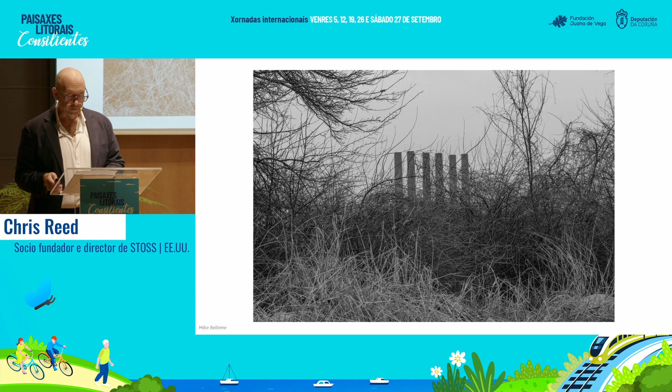Resilient landscapes, those that can shift and adapt with changing urban and environmental conditions, can be appropriated to restructure existing cities, to remediate and revitalize the infrastructural excesses of times past, and can form a new center point for healthy bodies and sharp minds, for social interaction and civic discourse, and sometimes just for pure fun.

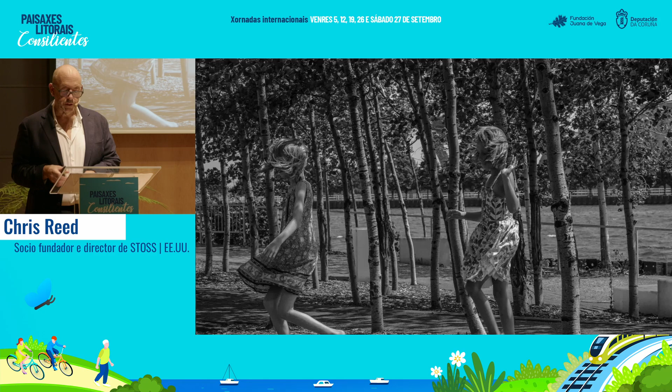Starting in the 90s and early 2000s, I was part of a movement formulating, testing, and applying concepts of landscape urbanism, whereby landscape and ecologically based systems could be infused into city-making efforts.

This work was rooted in late 20th century ideas of ecology, characterized by dynamic systems that were open to interactions across small and large scales, and that could change and adapt over time.

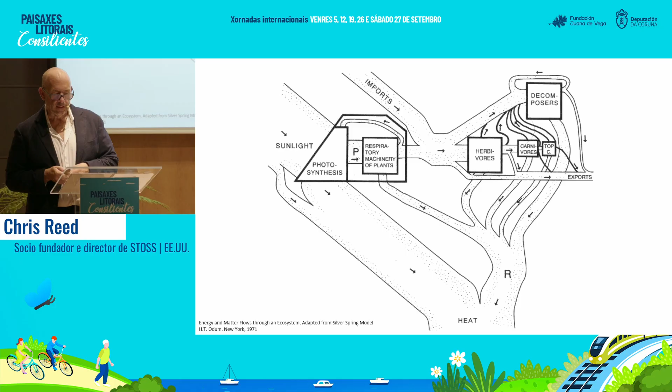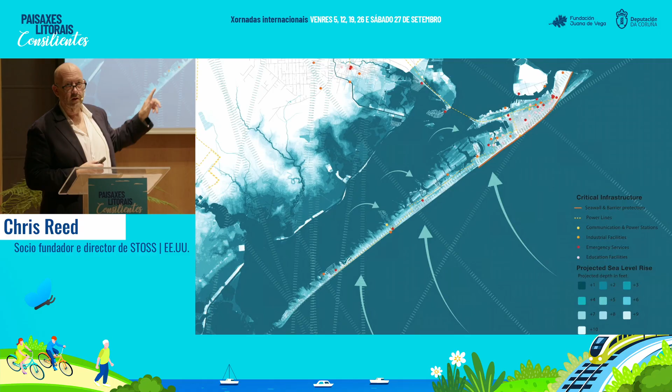What you're seeing in this image are flood projections from sea level rise and the course of numerous hurricanes that have hit this island over the decades.

The idea here was that cities formed or reformulated in these ways could offer richer and more fecund relationships with the broader environment, as directly organized by and experienced through a dynamic public realm.

Now, in many ways, these ideas were not so different than Frederick Law Olmsted's proposals for urban park systems in the late 19th century in the US.

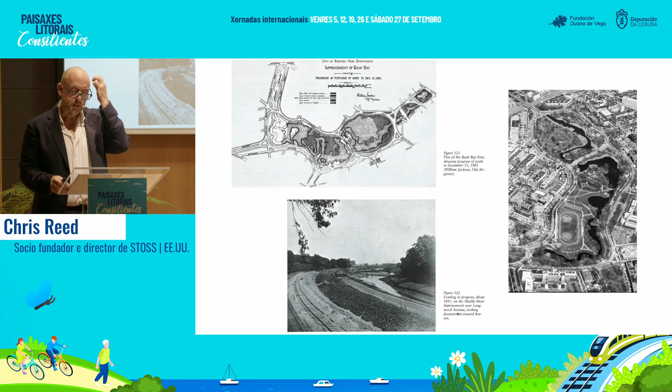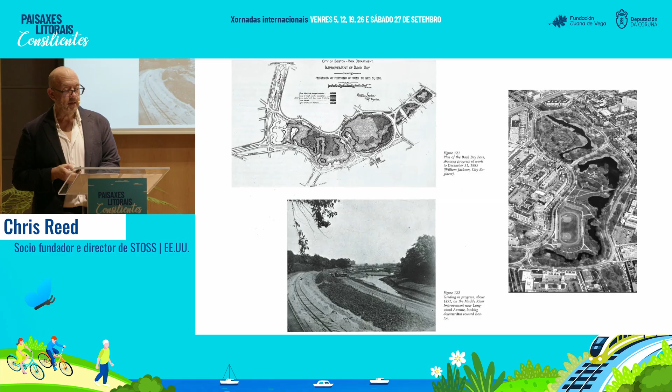In this way, these landscape-based park systems were green city building initiatives. Early on at Stoss, we explored these ideas in various projects.

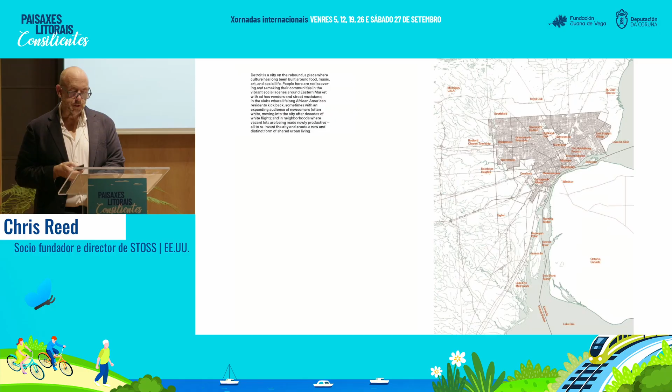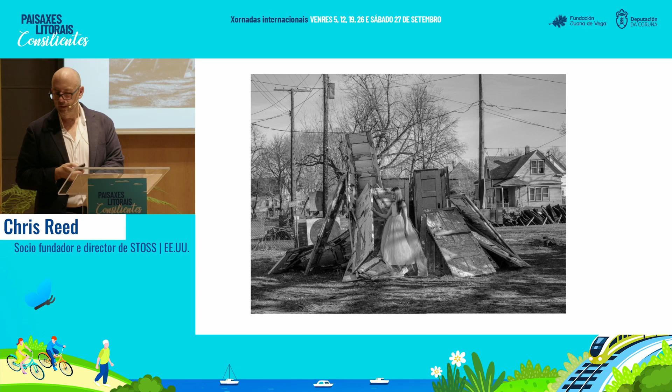In Detroit, a city that had experienced massive population loss and extensive vacancy, we drew on the emergent successional nature of landscape and a wide range of back-to-the-land, urban cultivation, arts and culture, and food culture initiatives in order to rethink the ways in which the city might be organized around vibrant green systems, landscape systems, green infrastructure, and new forms of green urbanism that foregrounded productive and functional landscapes and new open spaces at the heart of new neighborhood types.

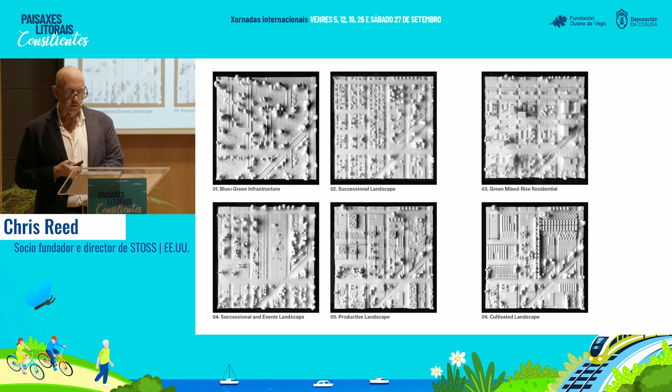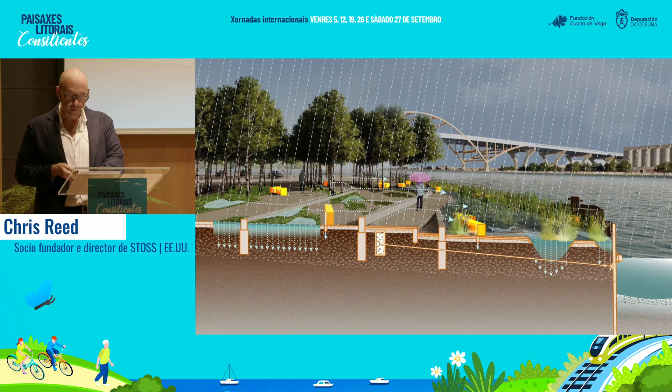And we started asking provocative questions. How might early experiments with dynamic stormwater and river flooding, and giving back space in the city to water and to restored urban ecologies and habitat, as imagined here in Milwaukee in the upper Midwest of the US.

How might a project like this inform proposals, much larger scale proposals, for high-density urban neighborhoods on the lakefront in Toronto, built around the logics and dynamics of a reconstituted mouth of the Don River?

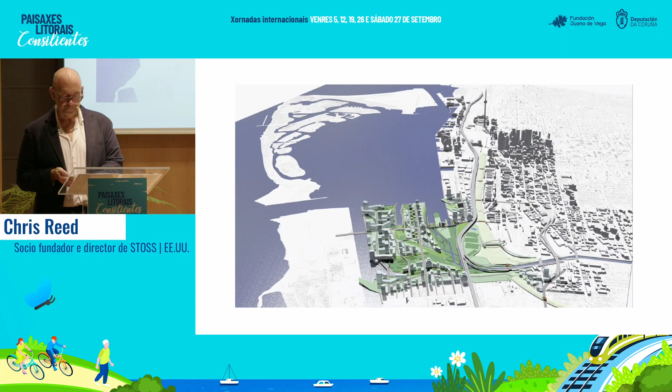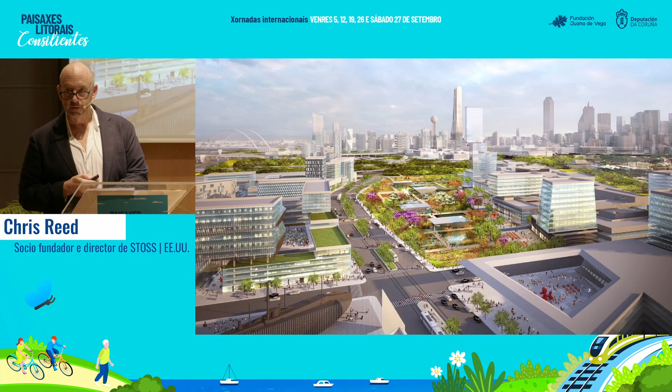How might a project like this inform proposals for mid and high-rise neighborhoods built around the stormwater waste of the city of Dallas, Texas, newly remade as water gardens and life-giving urban forests that offer biodiversity and direct contact with nature in the heart of the dense city?

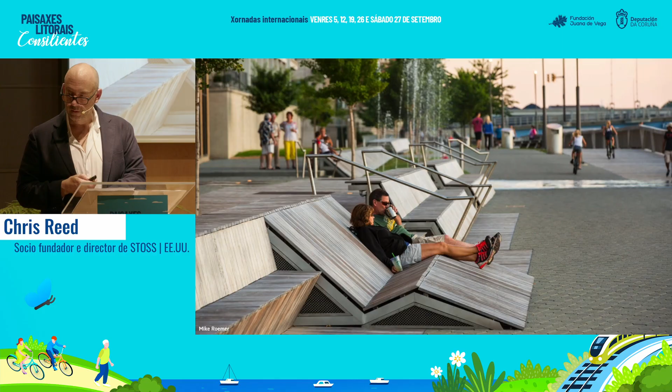And how might speculations of the ways in which large-scale hydrologic systems could be used as a basis for restructuring and revitalizing the center of Green Bay, Wisconsin, organizing both new open space and new mixed-use development around a civic riverfront designed both for people and for flooding?

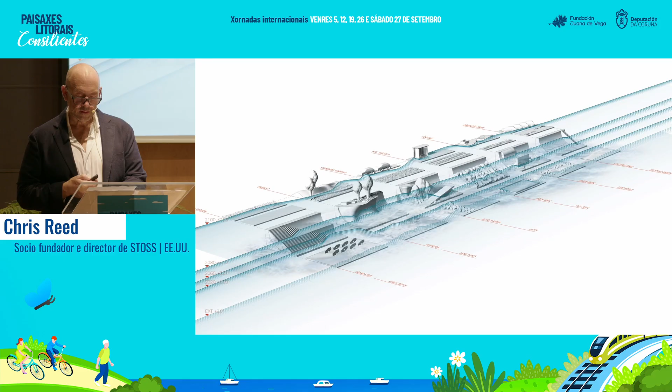How could projects like this inform proposals at larger scales in Galveston, Texas, for instance, that are designed to integrate floodable and adaptive landscape that revitalize individual neighborhoods and opportunities for experiencing regenerative new open spaces across the island?

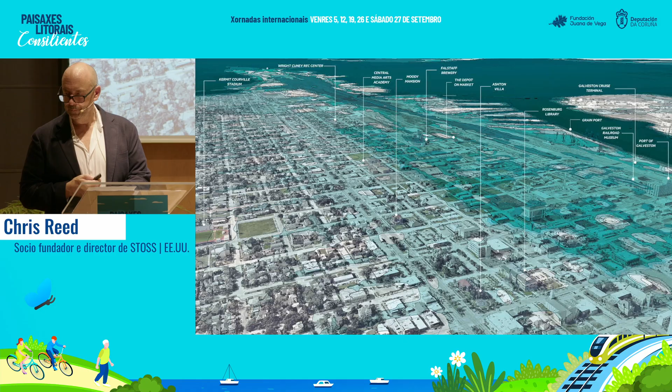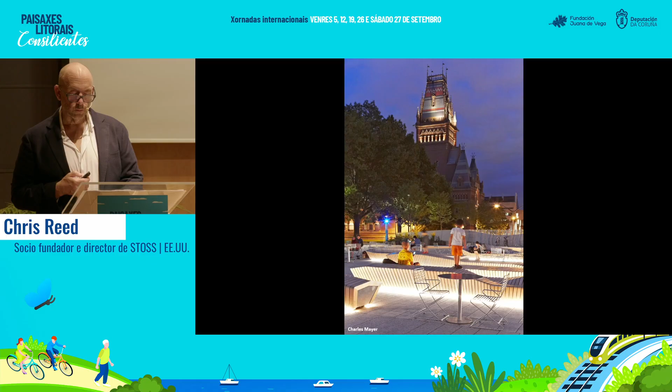At Harvard University, a new public landscape atop a roadway tunnel creates a new center of social life on campus, bringing together the academic community with residents, workers, and visitors who pass through the space on a daily basis.

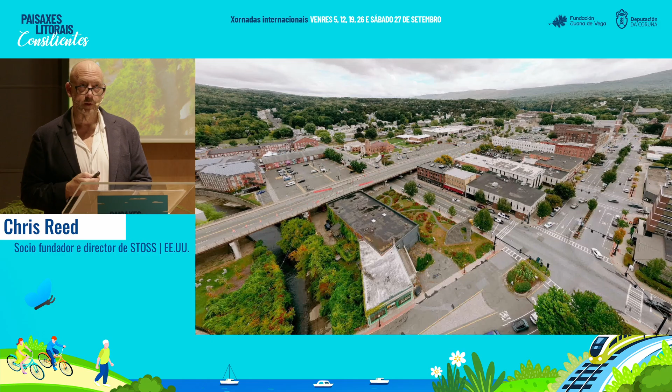In North Adams, a former industrial community in northwest Massachusetts, a proposal for removing a highway overpass constructed in the 1950s restitches the downtown and a vibrant contemporary arts museum to the Hoosic River, to new open spaces, and to new housing.

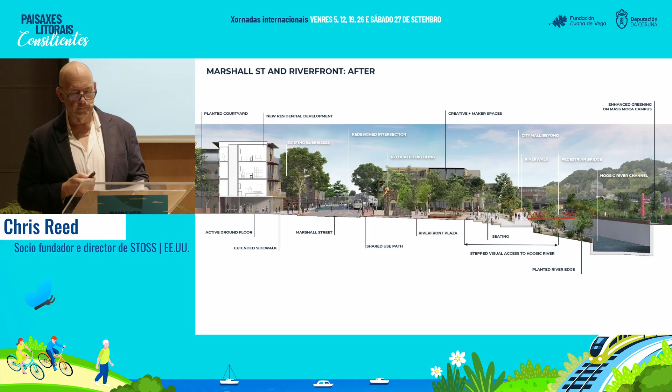In Boston, an ongoing initiative restitches the Chinatown community ripped apart by the construction of multiple interstate highways, with new opportunities for open space, affordable housing, and community amenities over a busy freeway, active rail lines, and a subway.

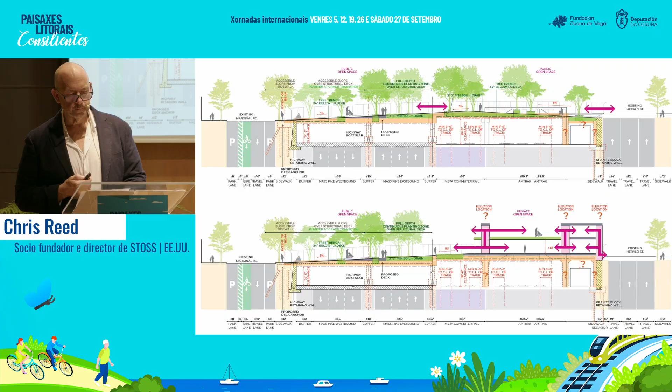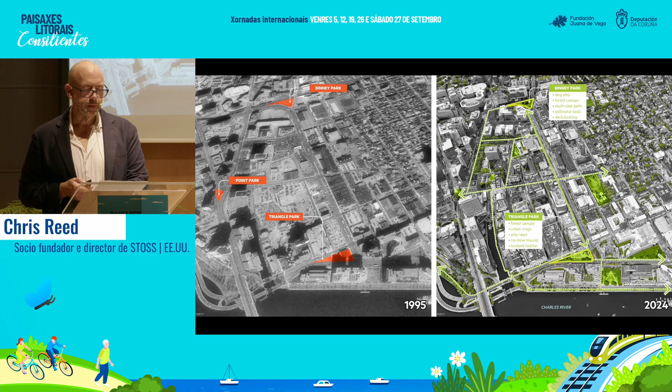And in Cambridge, a unique urban forestry demonstration project revitalizes one of a series of leftover and underutilized spaces in a part of the city with limited access to open space, a low percentage of tree canopy, and an intense urban heat island effect, where growth, succession, and adaptation is at the heart of the proposal.

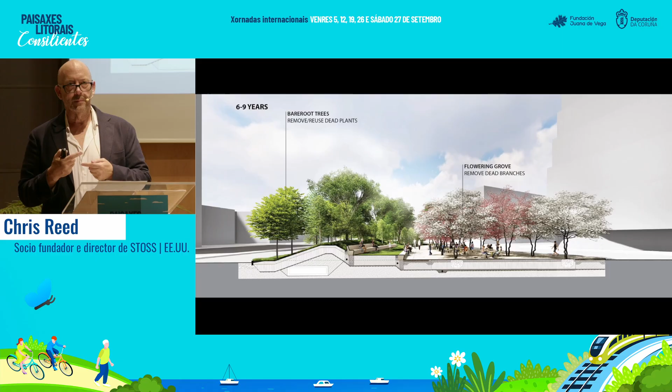You begin to see an animation that talks about not just tree growth, but trees outcompeting with one another to see which of these trees are best suited to that site over time.

This is an experimental project. It's a 1-acre site where we planted 400 new trees, 25 new tree species, and the whole idea here was a form of controlled natural succession. How is it that we overplant initially in order to allow the trees themselves to tell us which ones are best suited to the site.

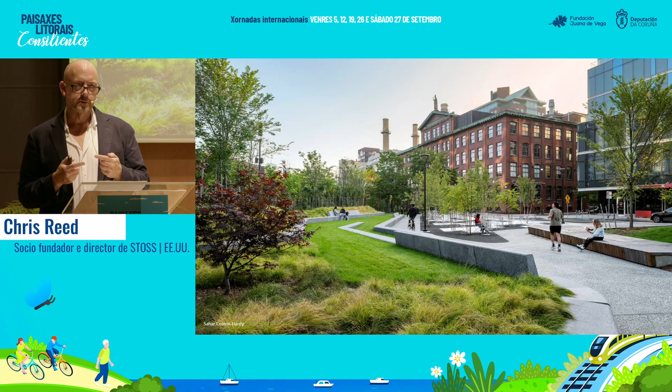To do this, you need a municipal authority and a partner that's willing to do careful operations and maintenance after the fact in order to ensure this kind of project's success.

It's a project that also creates a barrier to busy roads, cleaning air and water. It reestablishes biodiversity in the urban canopy.

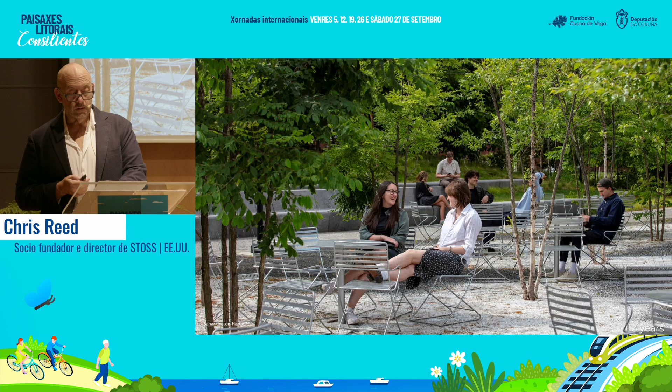Here you're seeing sequences of images from 1 year after planting to 3 years after planting. It's a project that creates a new community space for people inside the forest to directly experience the benefits of this adaptive urban forest to individual and collective health and well-being, including increased shade and reduced heat.

It also brings opportunities for interacting with nature and with each other in the heart of the city. So this is a project that will continue to grow and evolve radically over time.

These days, those same core ideologies of landscape urbanism are evolving to take on both the effects of climate change and new social agendas. Here we can talk about the increasing intensity and frequency of storms, hurricanes, and the flooding and wind damage that comes with them.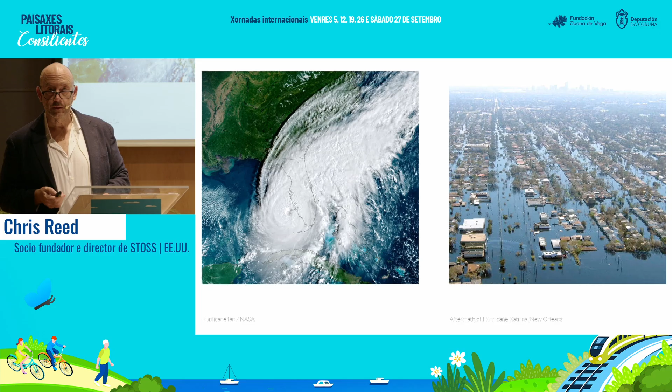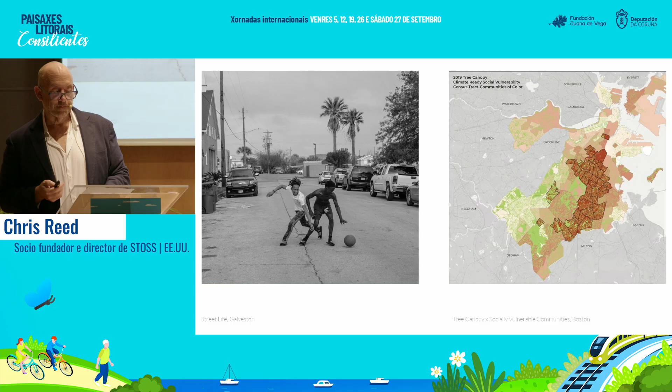River flooding and sea level rise projected to increase over time. In other places, we're talking about drought and water shortages, loss of biodiversity, increasing intensities of urban wildfire, rising heat levels exacerbated by hard surfaces and lack of tree canopy in cities, and clear evidence that the most socially vulnerable and lowest income among us experience the effects of climate change more directly and more intensely.

Given these challenges, we need to think differently as we design cities and new urban spaces, using characteristics of resilient landscapes as starting points: moving from hard to soft systems, from an understanding of the world as static to one as dynamic and ever-changing, from singular to multi-layered, multifunctional systems and spaces, and from a mindset of working against or resisting environmental forces to one about working with and adapting to them.

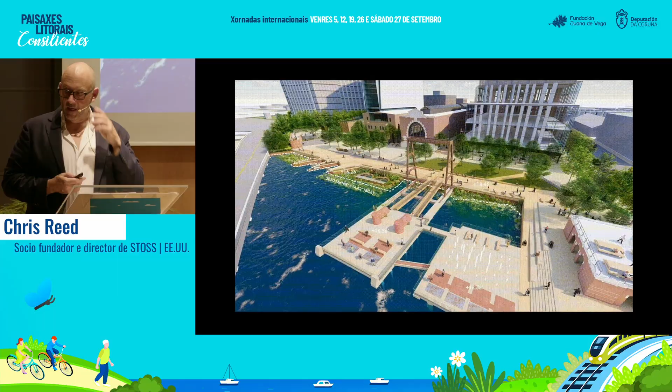This video of our proposal for an old industrial power plant on the port in Boston, a site being reimagined with a public waterfront, new housing and community commercial amenities, and workspace, captures the essence of many of these ideas: a multifunctional urban space, flood protection, public access, community building, increasing urban canopy, economic development, all built around a landscape framework and adaptive thinking.

Now, with all that as a starting point, I'd like to go into detail on three more recent projects that have consumed our interest, and that in some ways point to projects or problems similar to those being addressed here in the Port Redevelopment Initiative.

The first one is in the Southern Caribbean at Arnos Vale, St. Vincent and the Grenadines. This is a project that reimagines a 150-acre abandoned airport on the island of St. Vincent, envisioning a thriving new, resilient urban district that embraces its tropical waterfront setting. The goal is to create a flourishing, sustainable urban environment that prioritizes community, open spaces, and climate resilience.

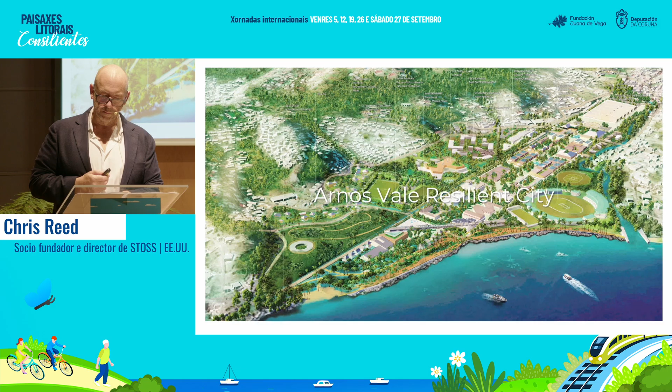Yet the desire here is to create new forms of resilient and active landscape, neighborhoods, and city building, retaining the active sport, even expanding it, and also keeping a few key heritage buildings that dot the site.

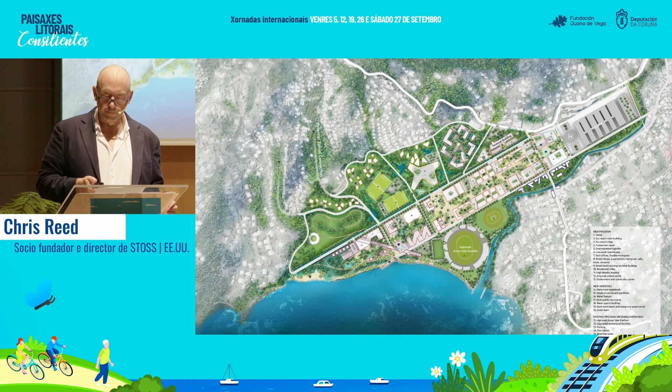The framework of this plan is organized around landscape systems, with the adaptation of the central runway as the central open space. So the runway is converted to this long central open space. The hills above are channeled into green fingers that irrigate an urban canal on the north side, preventing flooding from the hills into the center.

This is the flooding river on the south, remade in order to flood and to layer in people. This is the expanded sports facility, new cultural facilities, new recreational facilities, and a vibrant series of new neighborhoods lining the old runway.

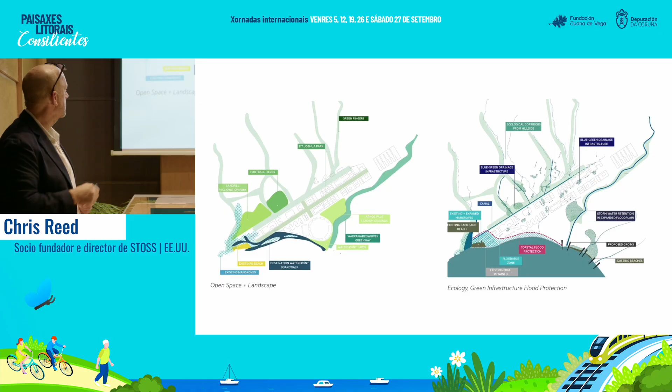This is what it means to start a big development project with landscape systems and then to wrap the building systems and neighborhoods around them.

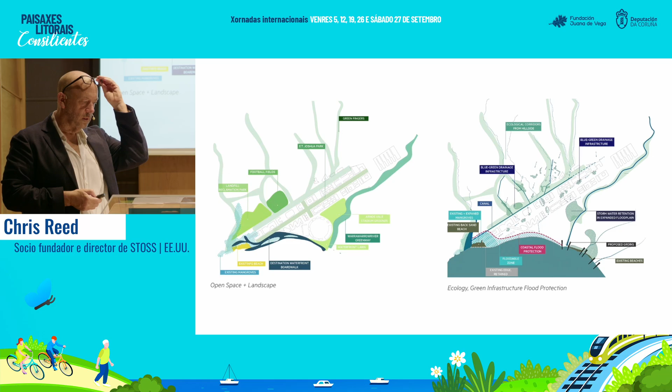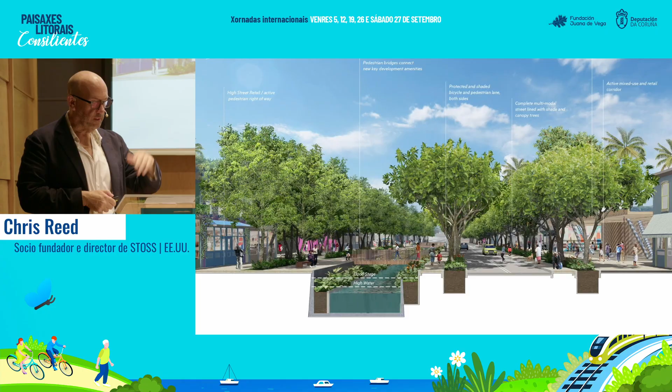This is an image of the Northern Canal. Notice high water and flood stage, low water down here. These are designed to fluctuate according to seasonal variations in flow.

This is the new riverfront, that eroding river that's been stabilized on one hand, revegetated to increase functionality and biodiversity, and then also integrated with pedestrian ways and bicycle ways, so it's opened up as a key piece of new open space.

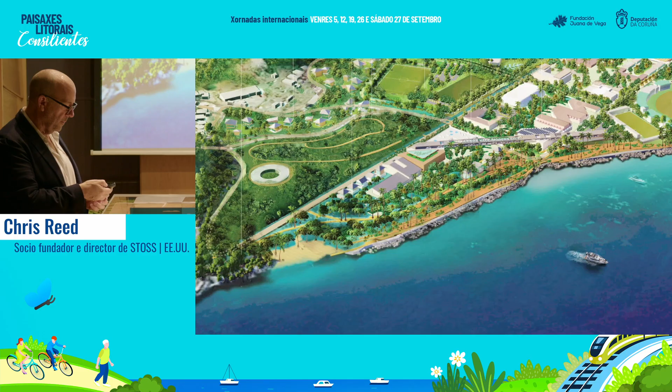And then the waterfront itself, buffered from some of the wave action, an expanded mangrove area that's cleaning water, adding life and sustainability, and then a series of terraces and walkways that make this a truly public destination waterfront, open to residents of the entire island and visitors who come here.

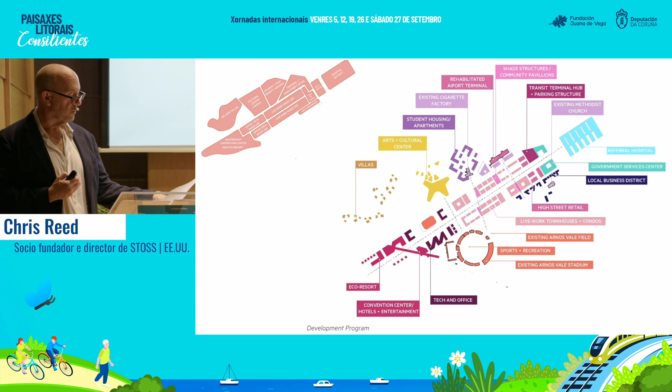These landscape networks then frame diverse building typologies organized around the former runway, including new types of housing, live-work development, retail business zones, cultural and recreational amenities, and tourism facilities. So it's being built up for residents who exist, but also to invite new people in.

Central to the vision is the transformation of the former airstrip itself into a multifunctional central park, creating a vibrant destination for residents, workers, and visitors alike, with a linear organization that speaks to its history.

Open space amenities here are tailored to the needs of existing residents from surrounding neighborhoods and from Kingstown, the capital, with extensive shade, misting fountains, cooling stations, and active public spaces in order to make this place habitable even during the hottest times of day.

In all these ways, the project strikes a balance between economic growth, environmental stewardship, and community well-being, reimagining the site as a climate-adapted, forward-thinking modern city.

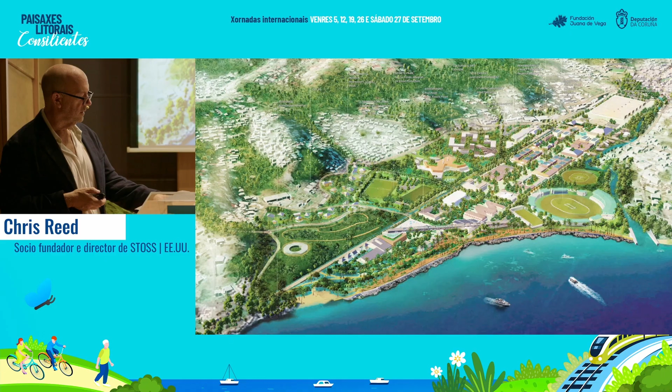Importantly, this is a project being led by us as landscape architects with a whole team of urban designers, architects, and engineers. But as landscape architects, we're able to offer that glue, that mindset of how to integrate these things in a complicated site like this.

The second project I want to share with you is Dealey Plaza and Martyrs Park in Dallas, Texas, in the middle of the U.S., a place that connects important public spaces of memory and celebration, through and across 20th century infrastructure, with new landscapes and green infrastructure of and for remembrance. This is a site with a lot of freeway and railway infrastructure, one that's been choked off by these infrastructure developments over time.

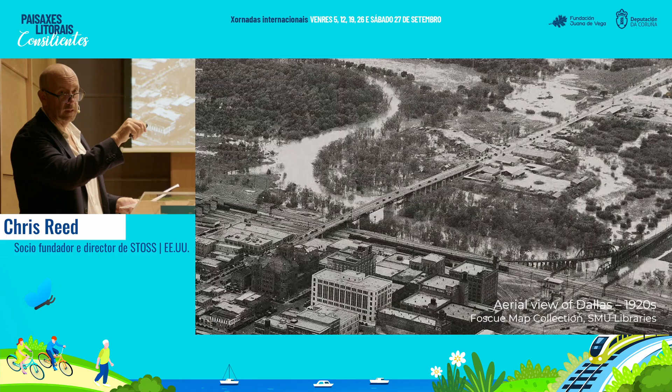The site that you saw is right here. This is what used to be the setting. The Trinity River used to come right up to the foot of downtown, but a series of devastating floods at the beginning of the 20th century convinced planners to move this river about a mile away from this location and to begin to redevelop this area.

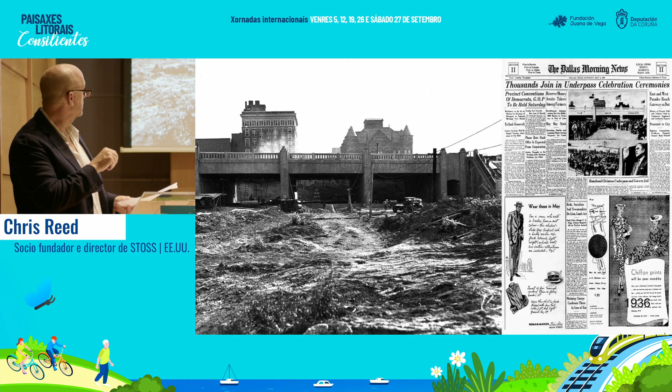You can see some of the old rail lines there. This is the construction of what's called the triple underpass, to carry rail lines above and roadway and highway vehicular lines below. This has been a site of transformation for many, many years.

It's also the site, Dealey Plaza, where in 1963 President John F. Kennedy was assassinated right at this spot from an assassin's bullet coming from that building. And so this space is now a National Park Service site of remembrance.

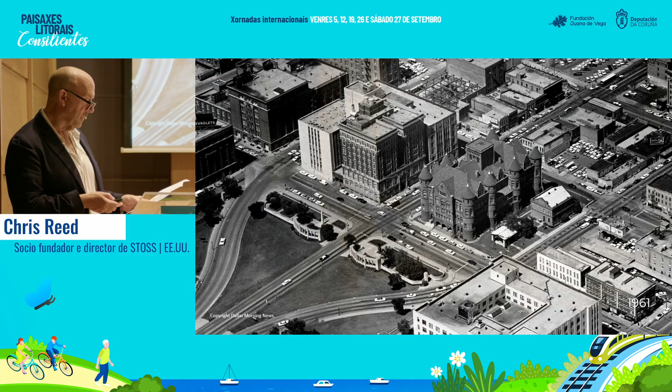But it's also a project that brings in the enhancement of a second park, the proposed Martyrs Park, a site nearby that was the site of a lynching of 3 innocent black men.

That video was taken from this location right near the place President Kennedy was shot. This is Dealey Plaza. These are those railways. This is the site of the old river. This is Martyrs Park, a little park that's really just inaccessible because of all the roadway infrastructure around it. And then you get a sense of all the highways, freeways, and off-ramps that really choke the site here.

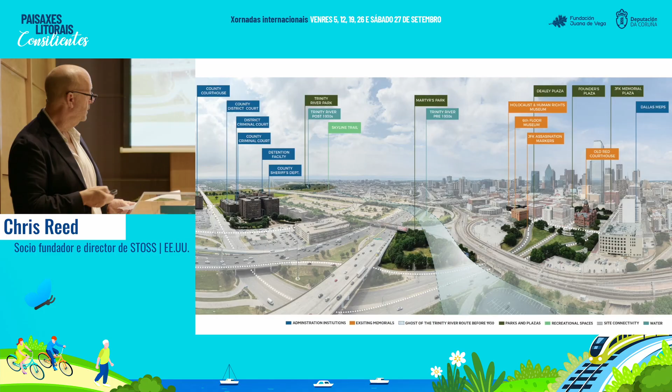And this is the proposal, an idea of really connecting those sites through new kinds of landscape and people-oriented infrastructure that bring us up and over some of the old infrastructure, wrap around to connect one site to the other, and close down certain roadways, both to offer space for remembrance and also to begin to think of this as an enhanced urban pedestrian-oriented district.

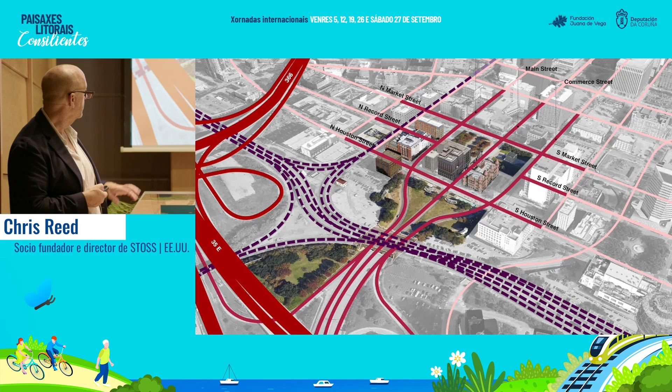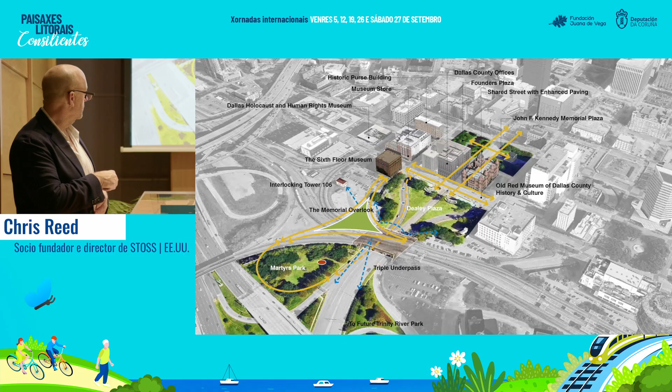Here you can see very quickly the set of strategies: the 2 spaces separated by the triple underpass, the tangle of roadways, railways, and freeways that choke those sites, the idea of connecting up and over and back around, and creating a space for reflection, hovering over the tracks in the middle, and then again, by shutting down one of those roadways, opportunities for connection, reflection, and remembrance.

The site sequentially has a series of moments. As you come around the site, you start to ascend. There's a small gathering space for orientation, for initial reflection. A pedestrian is then drawn up to the top of the site over the tracks.

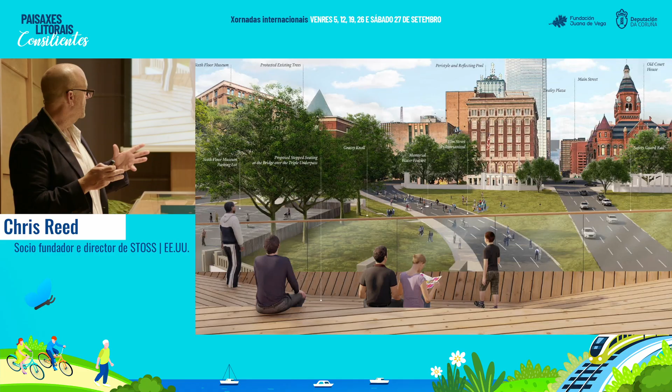Where they're given a perch to look back at the place where Kennedy was shot, the building from which the bullet came, and the general environs of the space where these events happened. A quieter place removed from what was going on, but one that finally gives an opportunity for taking it all in safely and quietly. And then one can continue around the back through a series of existing trees, down and around.

To the memorial, the proposed memorial, not designed by us, to the martyrs that were lynched in the other space. So really using forms of landscape infrastructure to overcome the barriers of existing roadway and railway infrastructure, and even to create new spaces like this in the center that hover above everything and just offer moments for quiet reflection, or even for release, for kids to just run around and have a moment to themselves.

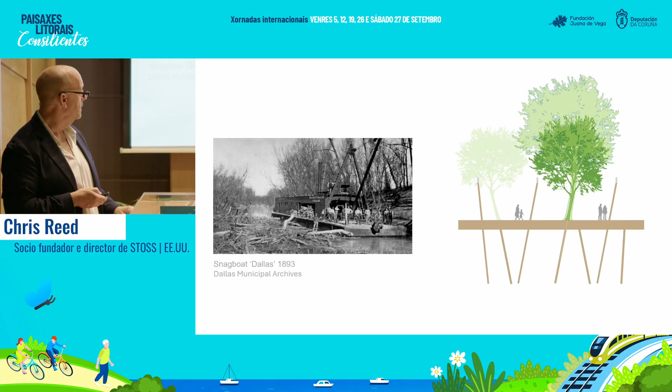So this nice little subtle moment of poetry, really, of a landscape recovering from a starting point that was a bit unusual. And then finally, these bubbling water features, marking those spots where the bullet hit the president as a very subtle remembrance.

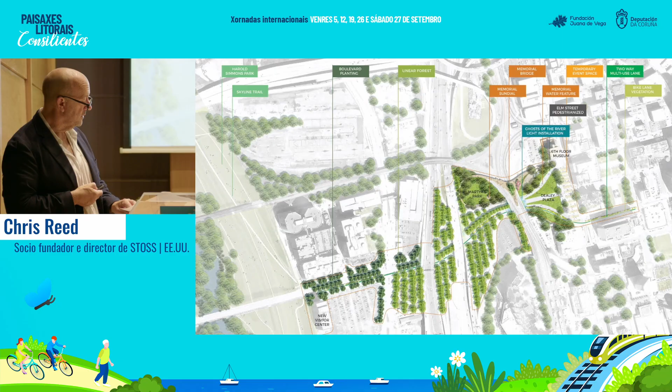All of this is woven together and back to the Trinity River via an extensive forest planting that cools the city, manages and cleans stormwater, provides a visual, sound, and pollution buffer to the surrounding roadways and freeways. A site reimagined to better engage its multiple, sometimes troubled histories, and to provide a new kind of forum for remembrance and civic discourse.

And then finally, resilient Moakley Park in my hometown of Boston, Massachusetts, a plan that transforms one of Boston's largest waterfront open spaces from largely a single-use recreational facility into a resilient and multifunctional 21st century community park.

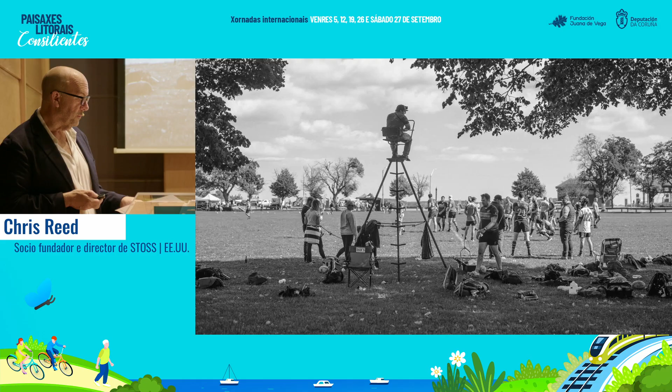It's a space that's accessible by public transportation, and within 15 minutes of a diverse set of neighborhoods, Moakley is poised to be an unprecedented park for these adjacent communities and for all of Boston, one that provides safe and equitable access to high-quality waterfront open space, community resources, as well as athletics and events for all ages, abilities, and backgrounds.

But the plan at its heart addresses the city's most pressing climate justice issues, including stormwater management, urban heat island effect, and coastal flooding.

In fact, here, the coastal flooding, which initiated the project, is designed to protect the park and surrounding neighborhood and infrastructure from a predicted sea level rise of 21 to 40 inches, just above 1 meter, in the next 50 to 60 years.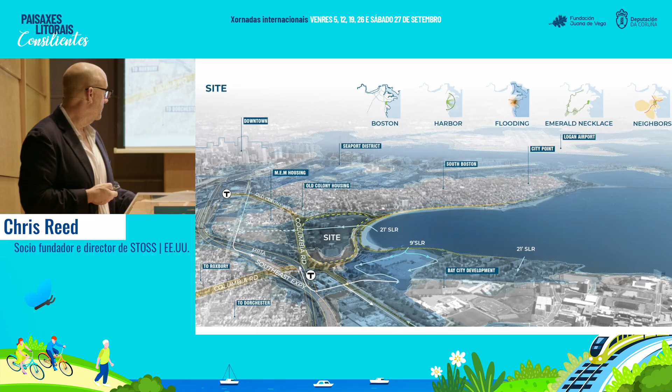And while residents understood the need for this forward thinking, they were also talking to us about the ways in which many of the sports fields on the site flooded now from stormwater, on a very, very regular basis, which makes sense when you look at the history of this space.

This was filled land. Originally, the space was mudflat and tidal marsh here. Somewhere at the early 20th century, that site was filled and flattened. It was used alternately as a garbage dump, a public playground, and eventually a sports and recreation park. It also has a very active and vivid social history connected to the social movements in the city at the time.

Looking forward, though, we're looking at creating a dynamic and adaptive park, one in tune with the environment and that creates a better community space for people who live nearby and a better destination space for those across the city.

This is the coastal park section of the project, the part that's really designed to deal with coastal flooding. This blue line is a flood wall embedded into a landscape berm that allows us to create a topography here that can be flooded over time, and that for us then allows for the development of this incredibly rich new dynamic coastal park experience.

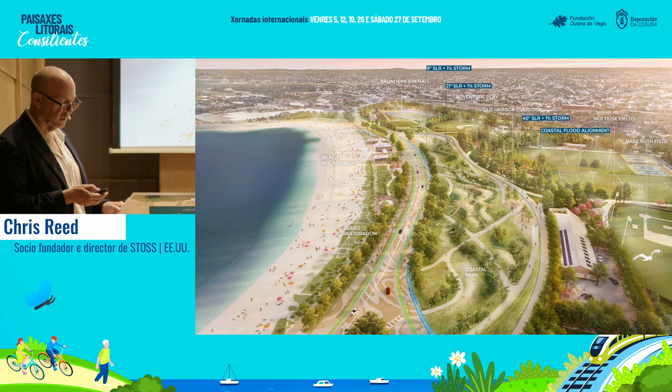Here's an animation of what happens. This is a kind of normal day at the park. You can see the water here, occasional flooding events that slowly make their way into the space, park spaces that are designed for the capture of rainwater, but as those rising seas continue to rise during a storm, you can see how the park is really designed to hold and capture that water and keep it behind the raised berm and embedded flood wall here.

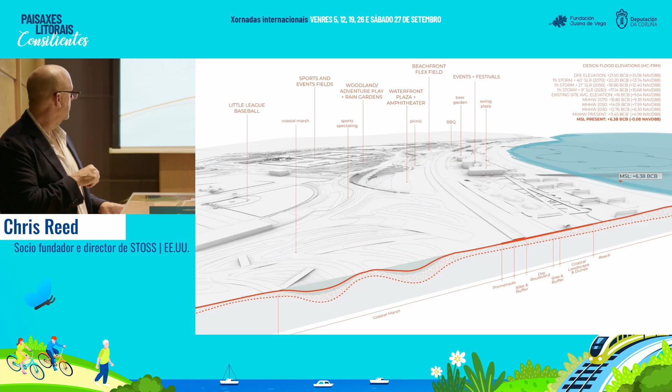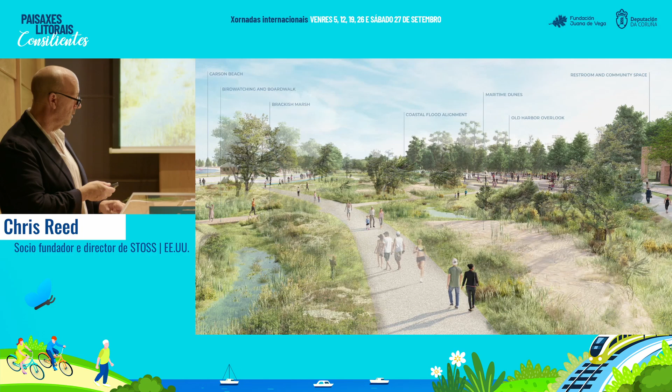This is what that space looks like. So no longer are we thinking of hard concrete walls. We're thinking of dynamic landscape spaces that can help us deal with the challenges of flood control and sea level rise. In this case, offering this new kind of coastal landscape experience in the heart of a park, really centered on people and spaces for collective gathering.

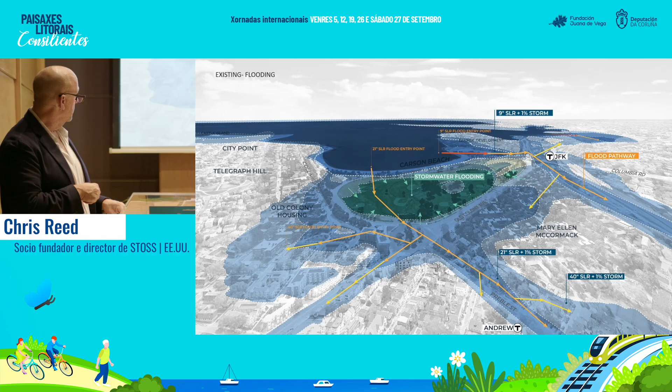Not only do we have these projections for sea level rise, there's a lot of stormwater flooding, and the park is redesigned to limit coastal flooding to the front part of the park, and has a series of other stormwater basins and gardens, green infrastructure scattered throughout the park to deal with stormwater flooding as well.

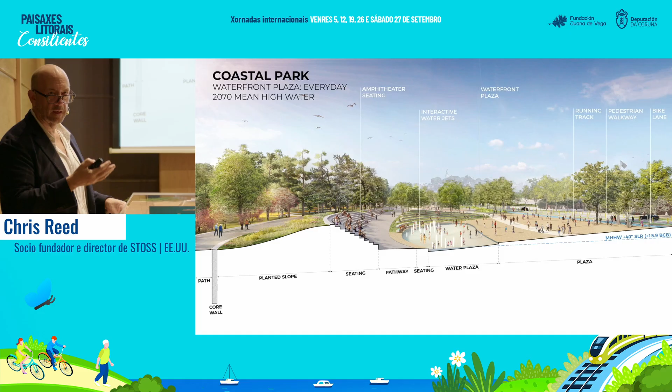This is an amphitheater at the heart of the coastal park, one that's designed for multifunctionality. So here you see it on an everyday basis. Here you see it being used for an event. Here you see it as part of that occasional storm surge in the future. And then the idea is that when that water recedes, it goes back to the day-to-day activity it can host.

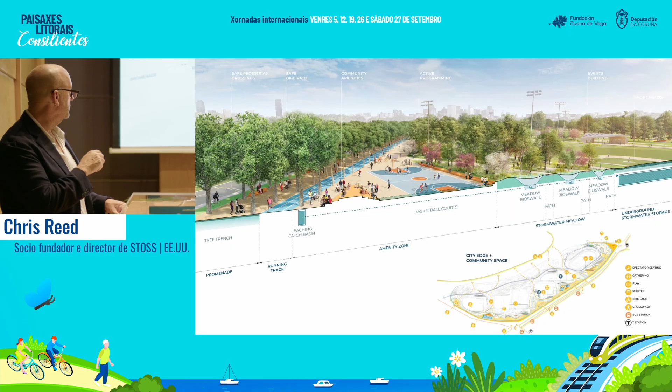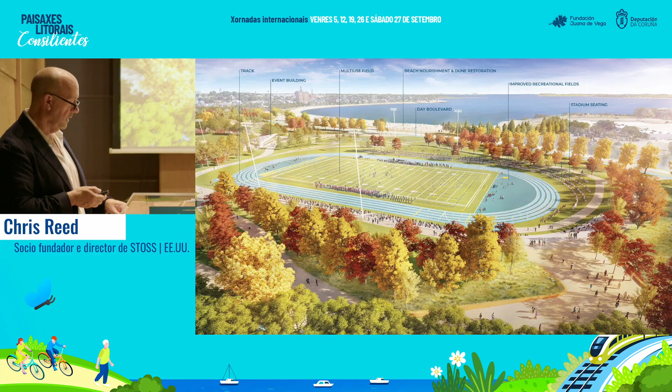In other parts of the park, along the city edge, walking spaces, promenades, dotted with different kinds of gathering spaces for different ages of people from the community, whether it's elders, kids, or teenagers. At the heart of the park, throughout the middle, a series of active sports fields to really retain that characteristic as a sports destination, now resituated with incredible views out to the harbor.

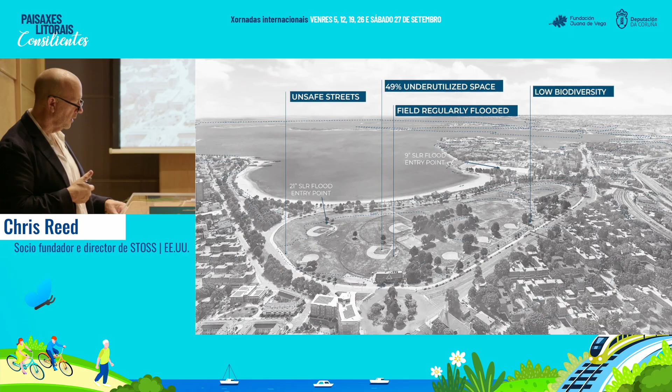And then overall a park that takes a pretty underutilized space that's monofunctional, that has flooding problems, et cetera, and really translates or transforms that into a multifunctional climate-adapted space that's really better adapted to the current needs of people.

Again, coastal flood management, urban heat island effect, stormwater management, reduction or increase of urban biodiversity, all together working toward one goal. A dramatic, multifunctional, active, biodiverse destination park better suited to the harborfront and neighborhood setting, poised to take on the most challenging effects of climate change in a rapidly evolving city.

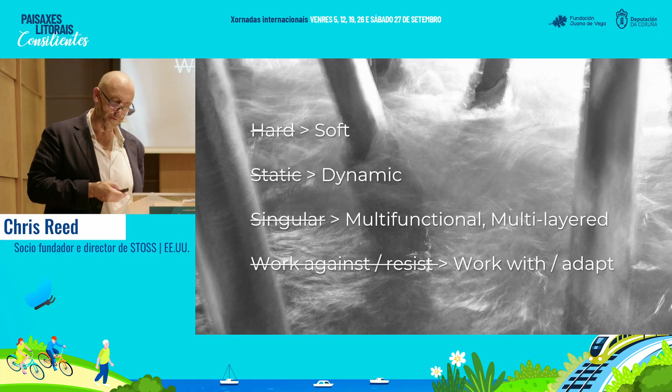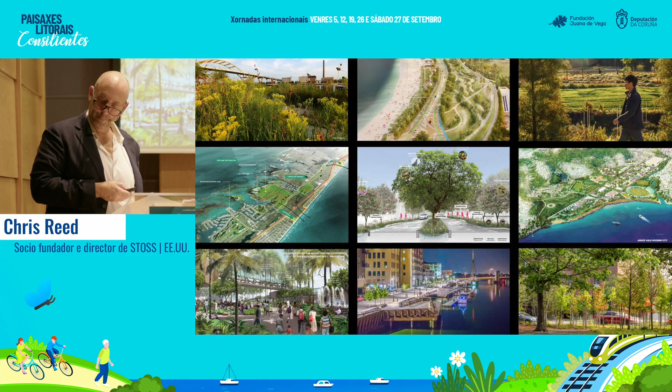These projects and others like them offer a different way of thinking, a different way of reimagining the infrastructure and underutilized public realm of cities from generations past, transforming sites into living, breathing, pulsing, active, and dynamic public landscapes and green infrastructure. No longer do we need to be constrained by the hard, monofunctional, single-minded, inflexible, and often defensive infrastructure of the past.

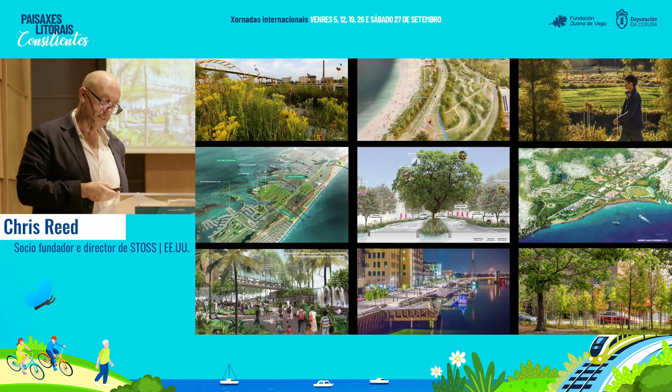Here we imagine new kinds of socially, culturally, and environmentally rich spaces, better tuned to the changing climate, better able to respond to the very contemporary demands and desires for what city living and civic life should be. These are cities and public landscapes enriched and revitalized and repositioned for today, for tomorrow, and for the century ahead.